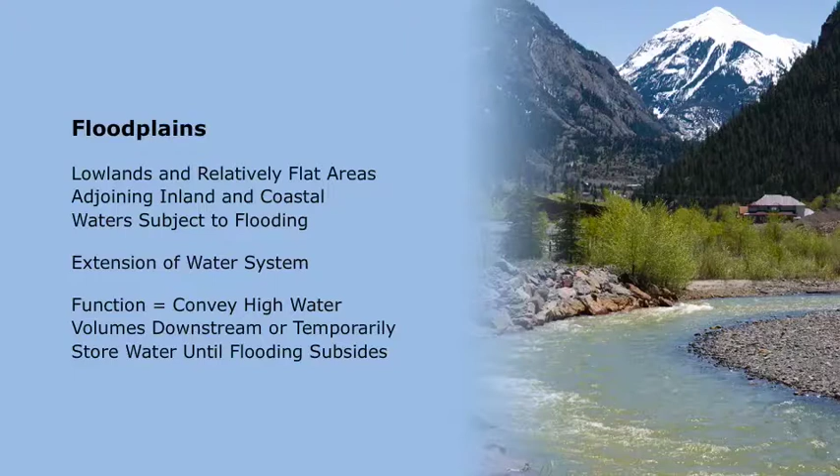Floodplains are the lowlands and relatively flat areas adjoining inland and coastal waters that are subject to flooding. They are an extension of the water system. Their function is to convey high water volumes downstream or temporarily store water until flooding subsides.

Fully functioning floodplains provide a variety of ecosystem services, including floodwater storage and peak flow moderation, resulting in reduced severity of floods, filtration and removal of water pollutants, channel stability and erosion control, wildlife habitat, groundwater recharge, stream base flow, beauty, and recreational opportunities.

Development and alteration of or encroachment on floodplains can disrupt or greatly reduce their ability to provide these valuable environmental and economic benefits. Floodplains are classified according to the likelihood of flooding in a given year.

For example, the 100-year floodplain demarcates the elevation that has a 1% chance of being flooded each year. The term can be misleading and is commonly mistaken for a flood that will occur once every 100 years. In reality, flooding can occur multiple times within a relatively short time period.

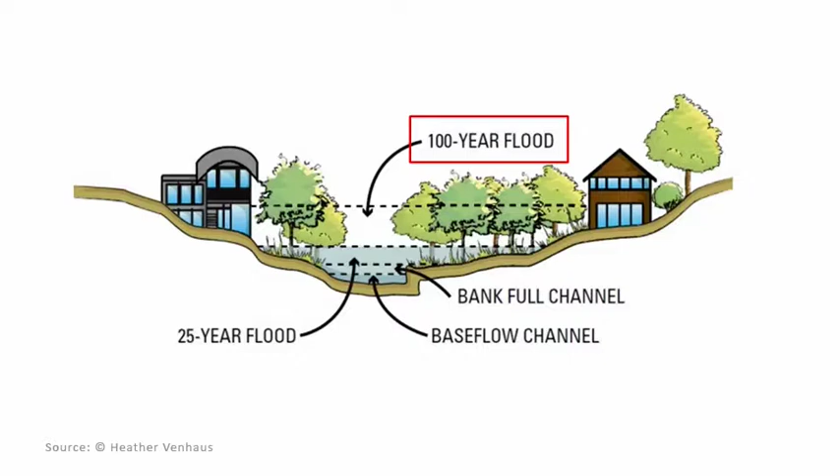Because flood events are not always consistent in their timing or severity, risks are often ignored or downplayed until flooding occurs, and it is too late to prevent poor development choices. The development and alteration of floodplains has resulted in an increase in flooding, danger to humanity, and environmental degradation.

Flood damages in the United States average over $3 billion each year and account for about 39% of all deaths from natural disasters, more than any other type.

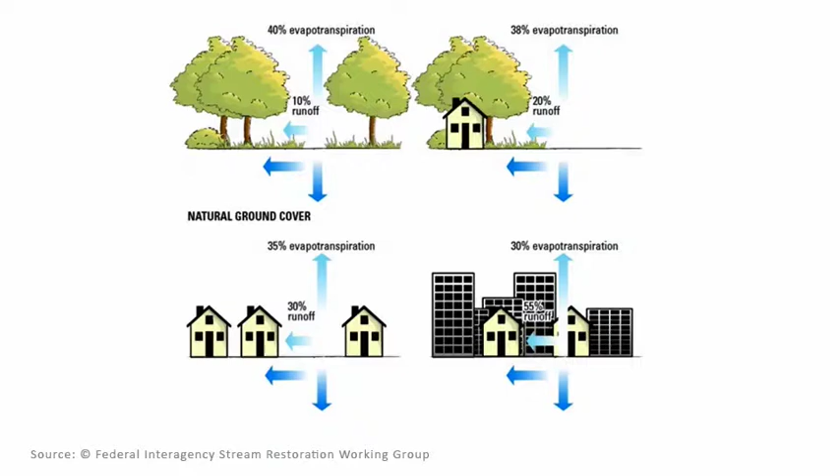Stormwater runoff is rain or snowmelt that flows off the site instead of soaking into the ground. Impervious surfaces are the primary cause of stormwater runoff in urban environments. Conventional roads, roofs, parking lots, and other impervious surfaces decrease the area of vegetated land available to infiltrate rainwater, which in turn increases the stormwater volume and runoff rate of the site.

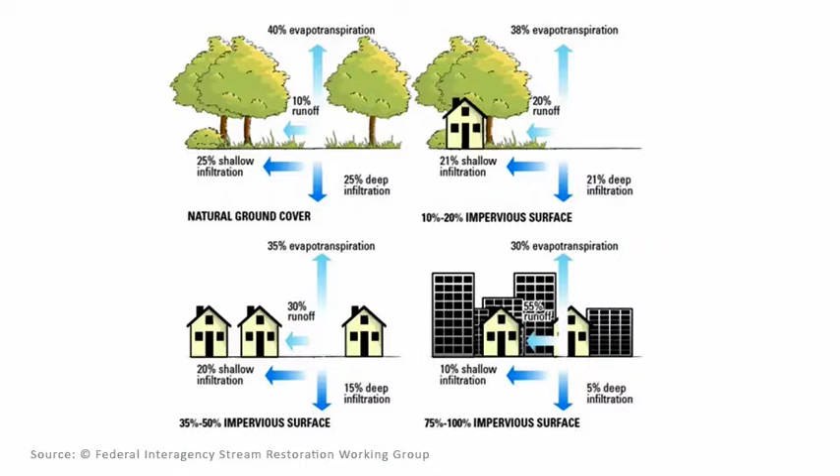This disruption of the hydrologic cycle degrades the quality and reduces the quantity of water resources by limiting groundwater recharge and transporting pollutants from urban land to nearby waterways.

Common stormwater pollutant sources include fertilizers, herbicides, and insecticides, animal waste, road salt, coal tar-based sealants used on paved roads, vehicle fluids, exhaust, brake linings, and tire and engine wear, sediment from improperly managed landscapes, roofing materials, and debris.

Stormwater runoff from developed land is the leading cause of water pollution in urban areas. As the stormwater moves across urban surfaces, it increases in temperature and accumulates sediment, nutrients, pathogens, heavy metals, and other pollutants that adversely affect water quality and degrade downstream aquatic habitats.

In addition, stormwater runoff increases the volume and rate of water entering sewer systems and stream channels, increasing the likelihood of flooding and the spread of pollutants.

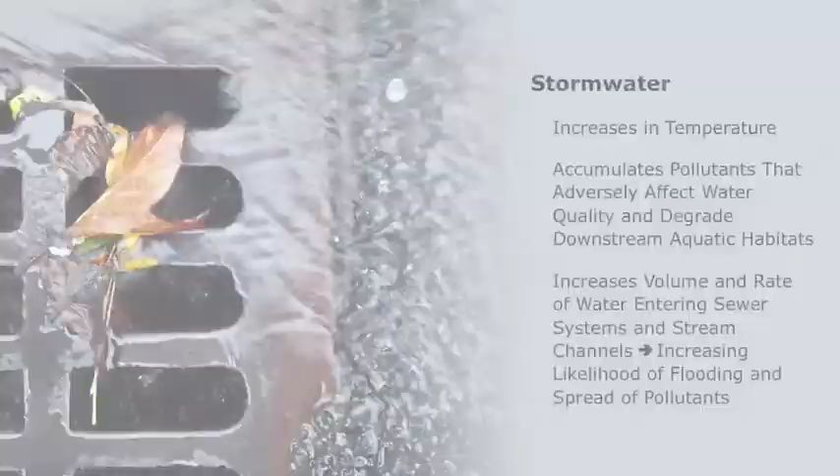Conventional storm sewer systems typically utilize pipes, culverts, or channels to quickly and discreetly discharge stormwater runoff to receiving water bodies such as lakes, streams, and wetlands. The runoff is not treated and pollutes water bodies used for drinking and recreation, as well as wildlife habitat.

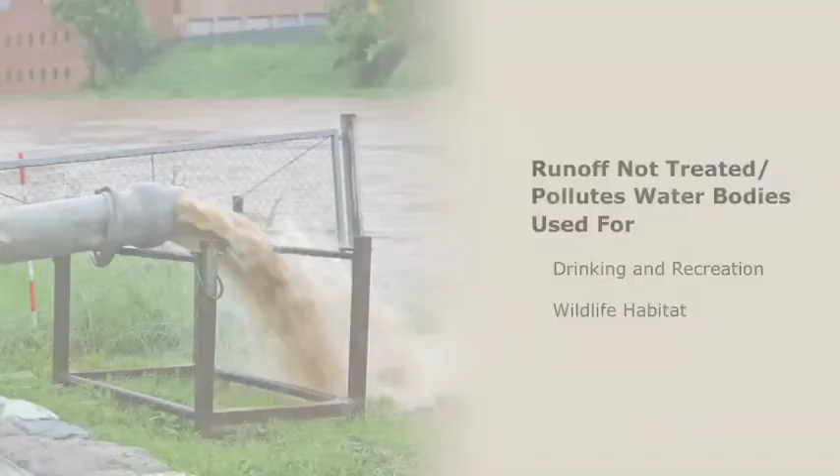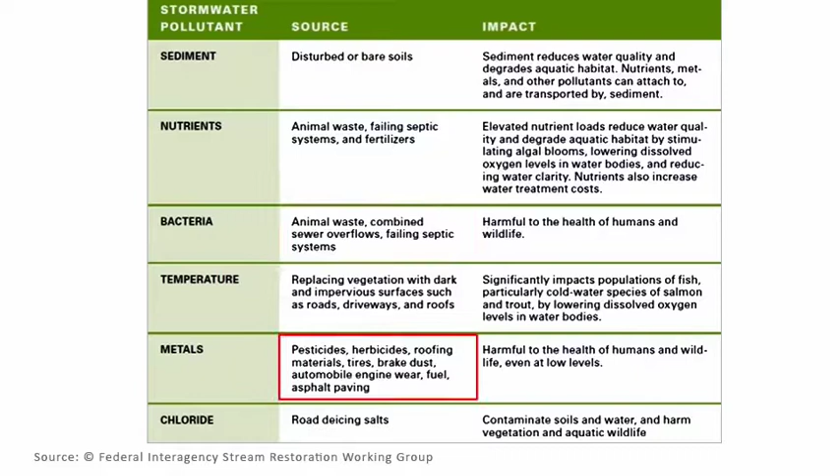In this table, we list the pollutants such as sediment, bacteria, and chloride. Next is the source, which shows bare soils, animal waste, pesticides, etc., and then lastly, the impact, such as harmful to the health of humans and wildlife.

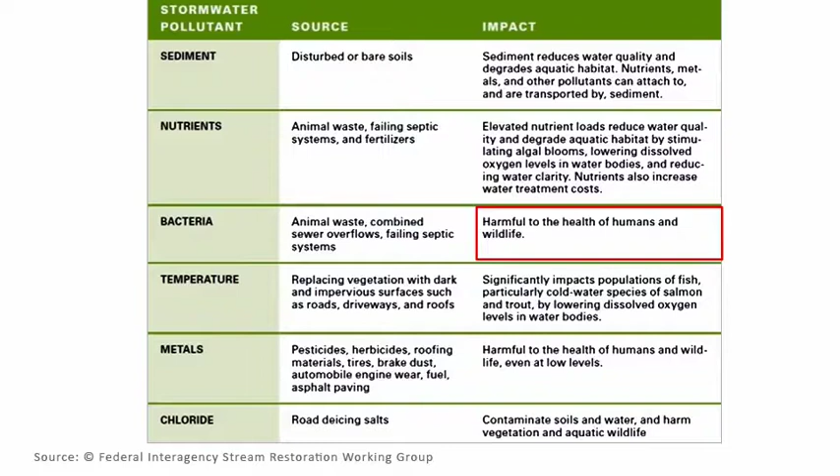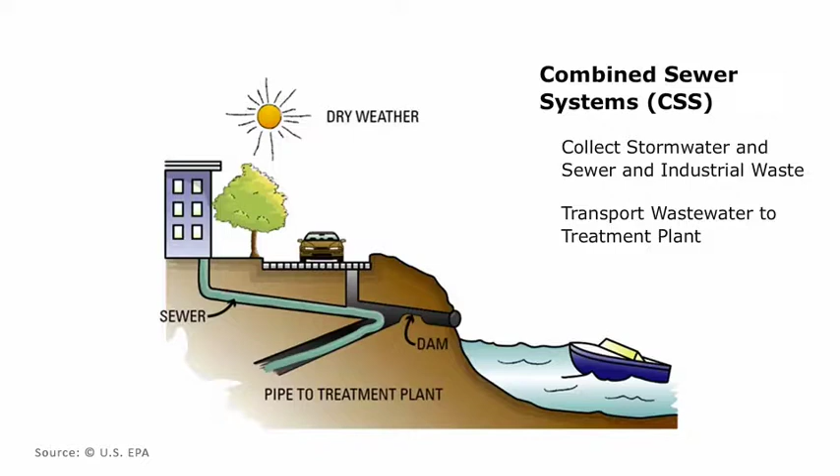Combined sewer systems, or CSS, collect stormwater and sewer and industrial waste into the same pipeline, and transport the wastewater to a treatment plant. During intense rain events, stormwater runoff can overwhelm the capacity of such systems. When this occurs, the CSS overflows and discharges excess wastewater into nearby streams, lakes, or other water bodies.

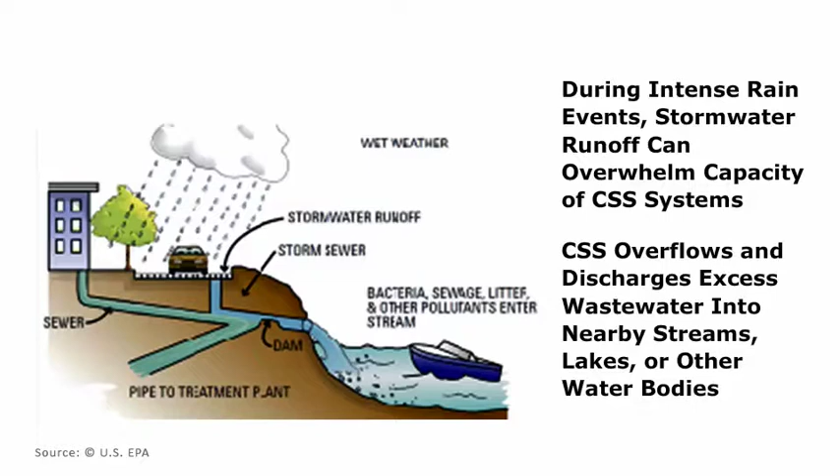Combined sewer systems serve an estimated 43 million Americans and are primarily located in older cities in the Northeast and the Great Lakes. There is also a small percentage along the West Coast. Combined systems are also common throughout Europe and make up a majority of the sewage systems in the UK.

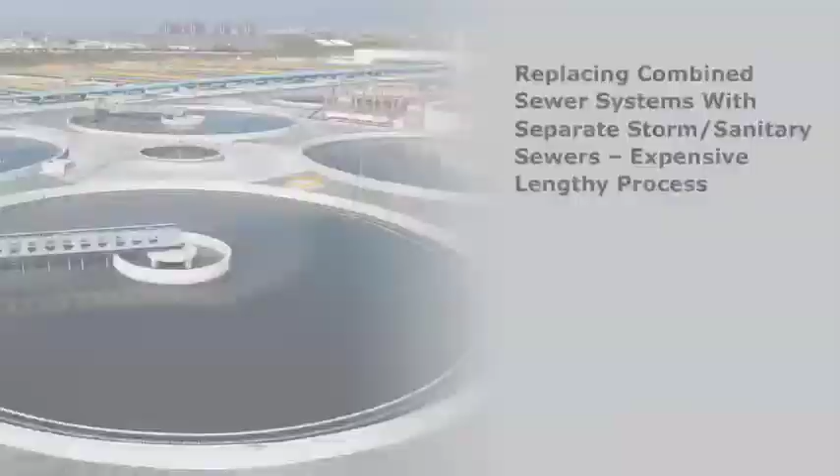Replacing combined sewer systems with separate storm and sanitary sewers is an expensive and lengthy process. Many municipalities are successfully working with property owners to reduce stormwater runoff, and in doing so have avoided increases in infrastructure costs.

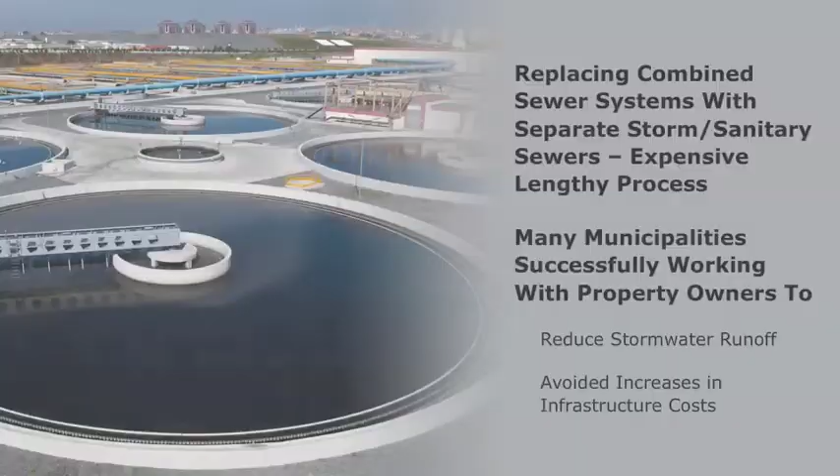Combined sewer overflows, or CSO, release stormwater pollutants and untreated human and industrial waste, toxic materials, and debris into nearby rivers, lakes, and other water bodies. The untreated wastewater is released in order to prevent backup into streets, homes, and businesses served by the combined sewer system.

The overflows can greatly diminish water quality and are a health risk for humans and wildlife. CSOs also limit the aesthetic value and enjoyment of waterways.

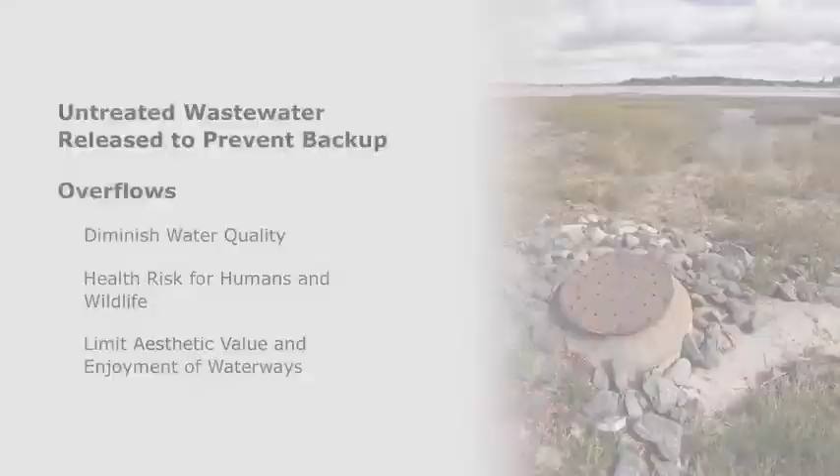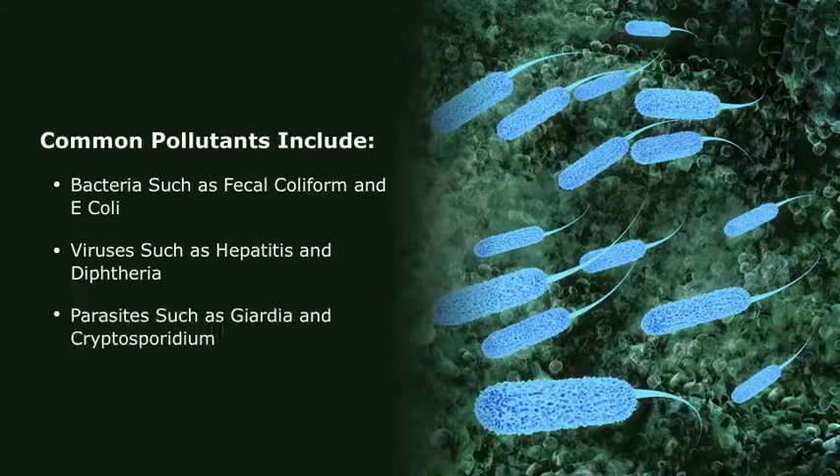Common pollutants include bacteria such as fecal coliform and E. coli, viruses such as hepatitis and diphtheria, parasites such as Giardia and Cryptosporidium, metals such as lead, zinc, cadmium, and chromium, oil and grease, trash and litter, and nutrients such as nitrogen and phosphorus.